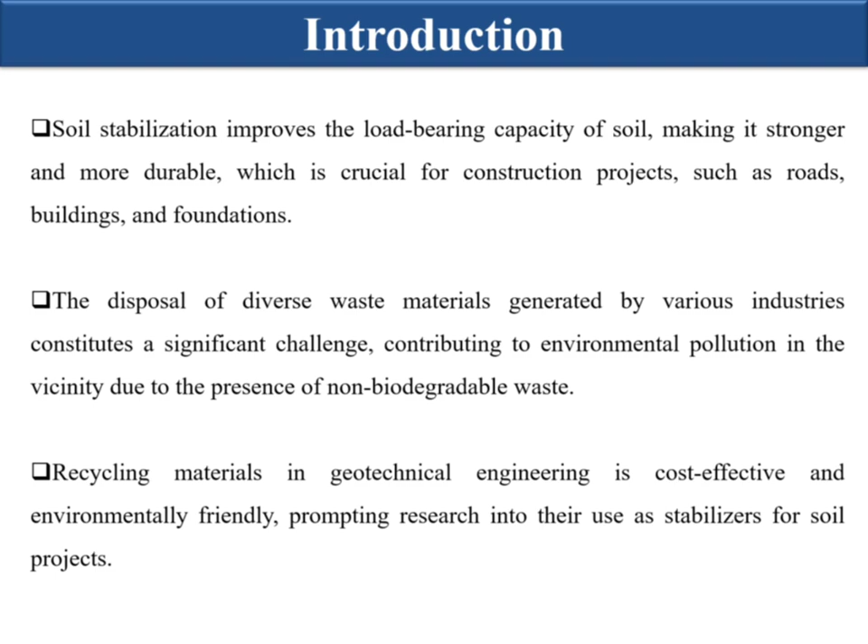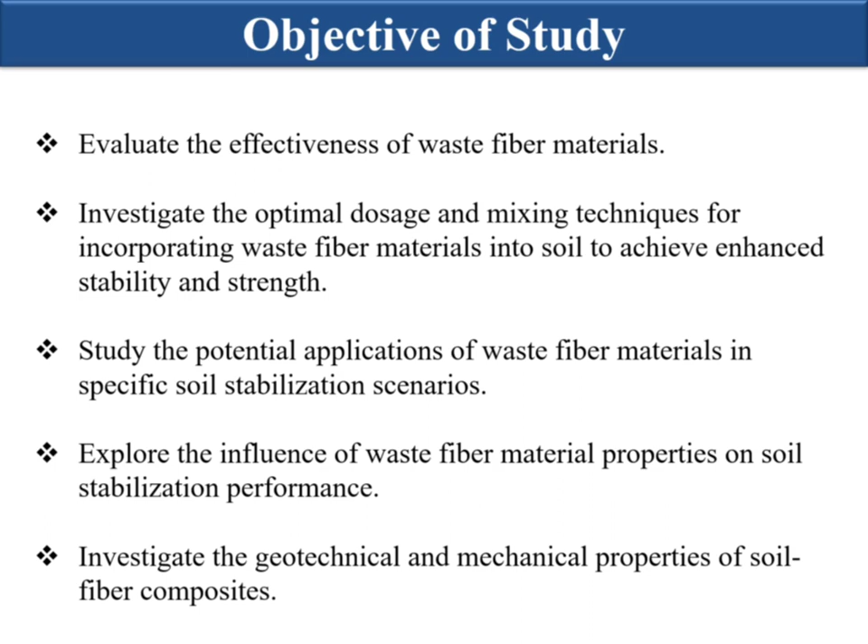Objectives of study: evaluate the effectiveness of waste fiber materials; investigate the optimal dose and mixing techniques for incorporating waste fiber materials into the soil to achieve enhanced stability and strength; study the potential application of waste fiber materials in specific soil stabilization scenarios; explore the influence of waste fiber material properties on soil stabilization performance; investigate the geotechnical and mechanical properties of soil fiber composites.

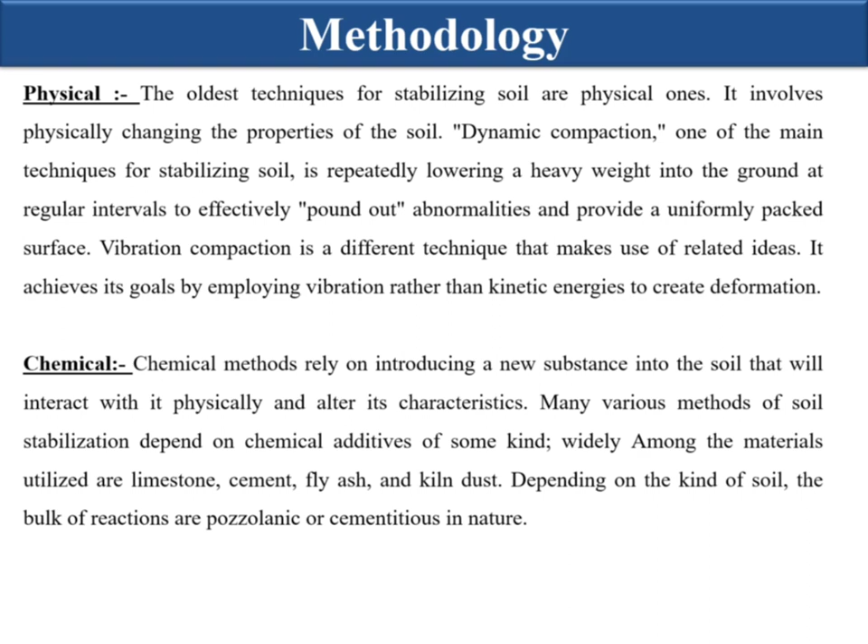Methodology. There are two methods for soil stabilization: physical and chemical. The physical method is the oldest technique for stabilizing soil. It involves physically changing the properties of the soil by dynamic compaction and vibration compaction. Chemical methods rely on chemicals or introducing a new substance into the soil that will interact with it physically and alter its characteristics. For example, limestone, cement, fly ash, kiln dust.

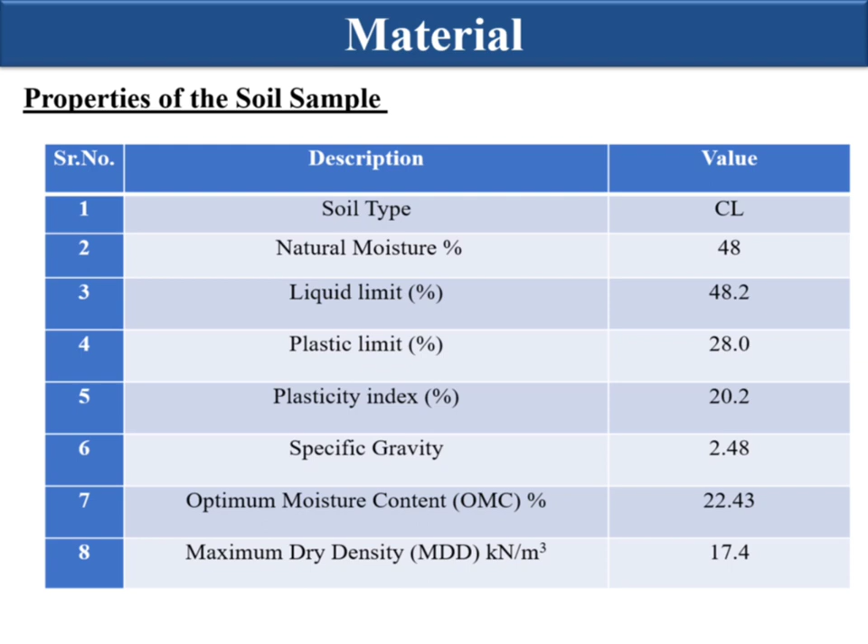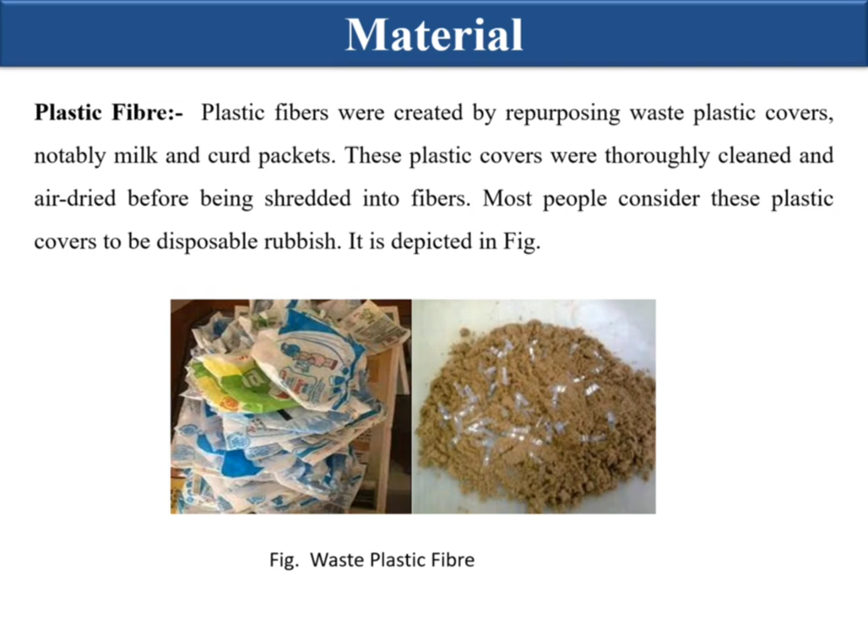Material. Plastic fiber. Plastic fibers were created by repurposing waste plastic covers, notably milk and curd packets. These plastic covers were thoroughly cleaned and air dried before being shredded into fibers. Most people consider these plastic covers to be disposable rubbish, but they are not.

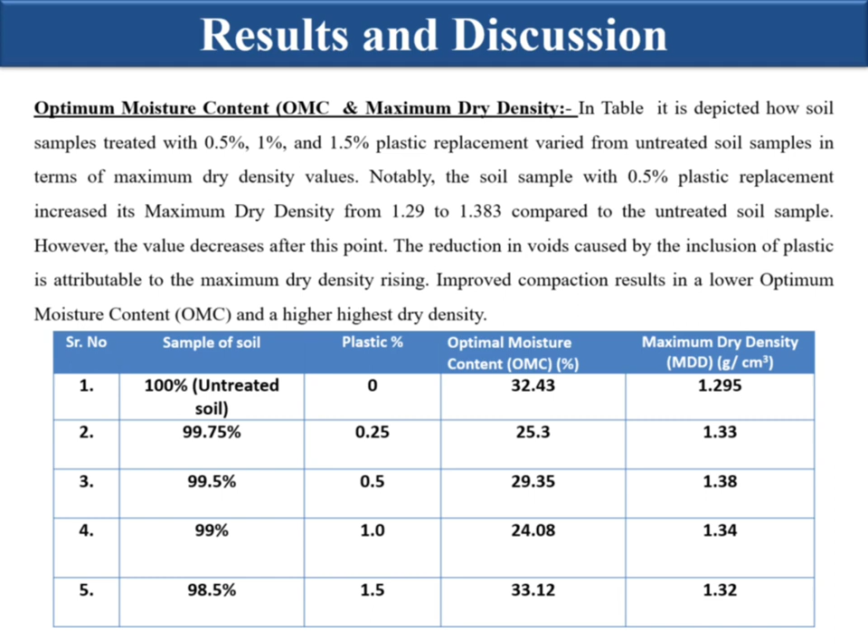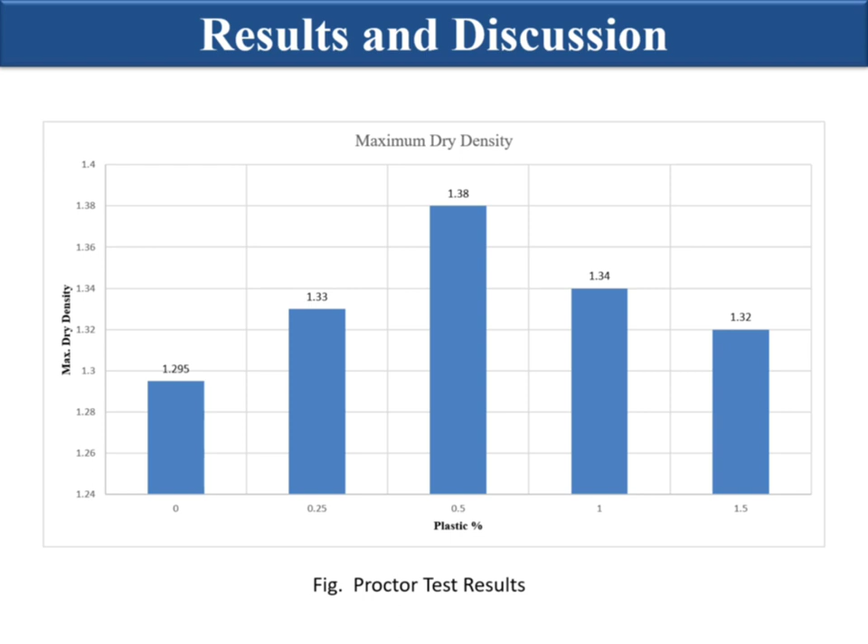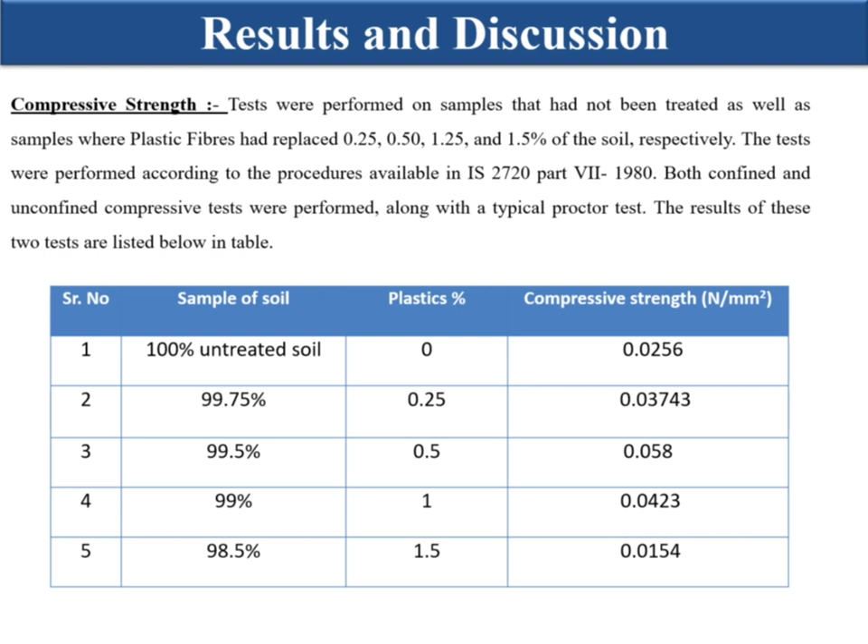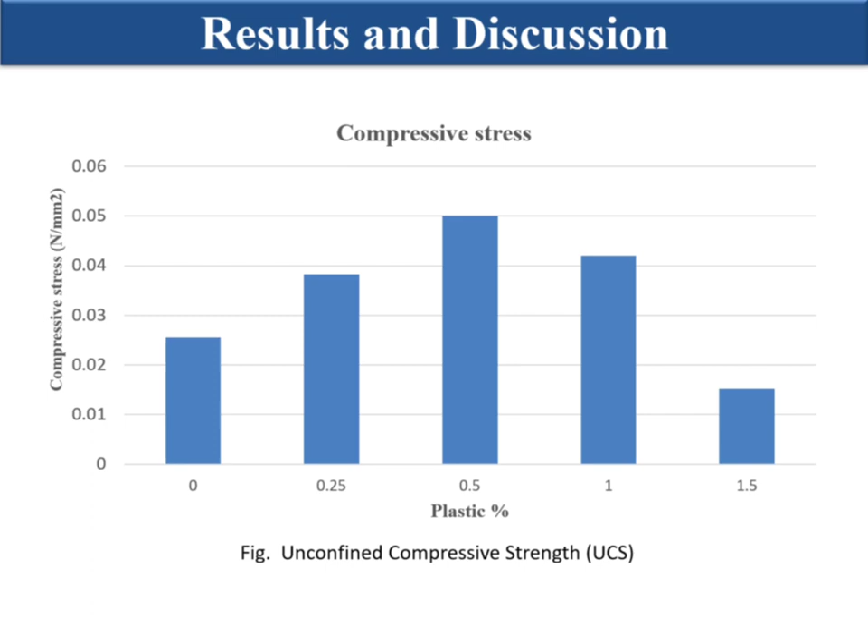This graph indicates the relationship between the plastic percentage and compressive stress. Here, the unconfined compressive strength is the total load per unit area at which an unconfined cylindrical specimen of soil will fail in the simple compression test. In this graph, it is clearly visible that when we increase the plastic percentage, compressive stress is also increasing. But when the plastic content reaches a certain limit, the value of compressive stress decreases.

Conclusion. This study aims to evaluate the effectiveness of plastic fiber in soil stabilization. The study shows that when properly blended and applied, plastic fiber can be a highly effective soil stabilizing method. The following are the principal findings. The expansive clayey soil optimum moisture content was decreased and the maximum dry density was increased by the replacement of 0.5% plastic fibers. It was discovered that soil unconfined compressive strength improved at 0.5%.

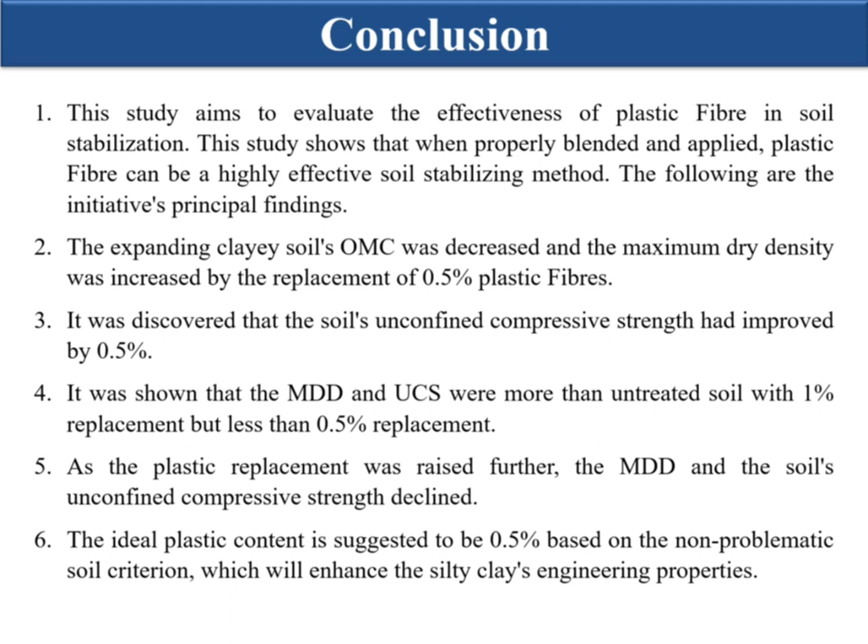It was shown that the maximum dry density and unconfined compressive strength were more than the untreated soil with 1% replacement but less than with 0.5% replacement. As the plastic replacement was raised further, the maximum dry density and the soil unconfined compressive strength declined. The ideal plastic content is suggested to be 0.5% based on the non-problematic soil criteria, which will enhance the silty clay engineering properties. Following are the references of my research.